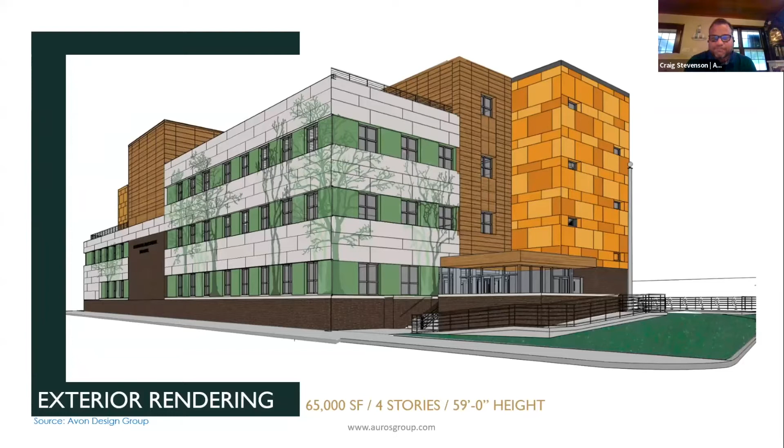Thanks, Craig. I get to sit back here for a second or 3 and admire this building. It's just lovely. So, this is my slide before the acronyms start and the engineers jump in. So why am I so proud of this building? Why, as an educator, this building, this school, it represents a couple of things, right? A set of commitments to the following things, really.

Certainly to our region and our city's journey to reduce the overall carbon footprint, and that's something to be super proud of. It certainly commits to the health of our students, our employees, and the community members that are going to use this public building going forward.

And as was mentioned earlier, we're a charter school, and charter schools have a distinct role in public education in the US, and that is to drive innovation in public education. And I see this building as an example of a next generation healthy and green school, all built within and on public school budgets and tax dollars. And so that is a terrific commitment and a terrific part of this journey.

Secondly, this building embodies the mission and values of our educational institution. It's a teaching tool that is dynamic and provides data every day that allows students to engage in and manipulate, and lots of evidence there. It allows our students to engage in air quality conversations and research around energy and storm water management, through that marriage of passive house and RESET Air.

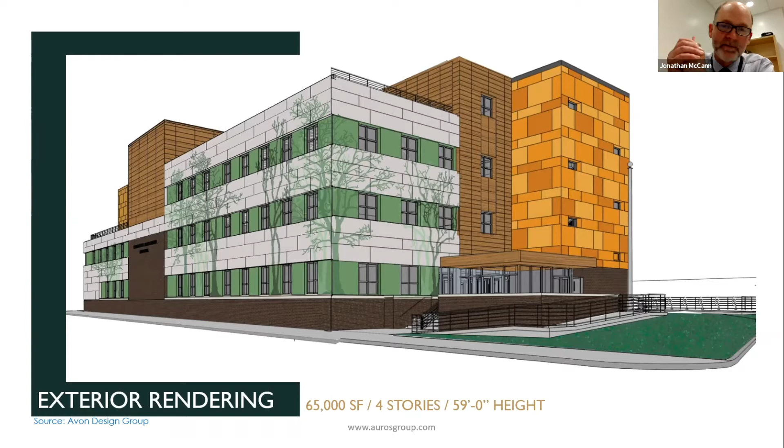And so that is what this building represents, all of that, and that continuum from kindergarten through 12th grade. So we're enormously proud of that work, and the fact that this is going to be a passive house and everything underneath that. So, Craig, you want to add to that? Nope, we're good to go, John. That was a great explanation. I'm just going to advance the slides here.

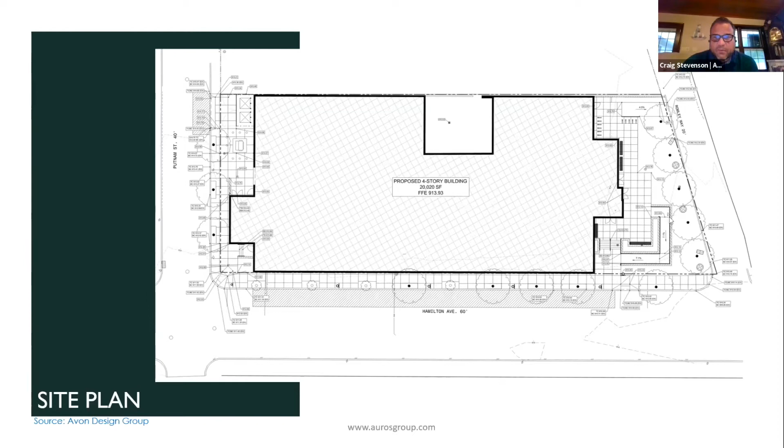So massing and orientation wasn't really an option. We had to really go after window to wall ratios and other criteria to try to help ourselves meet the envelope performance requirements of passive house. But this is exactly in line with the Environmental Charter School's mission for urban infill.

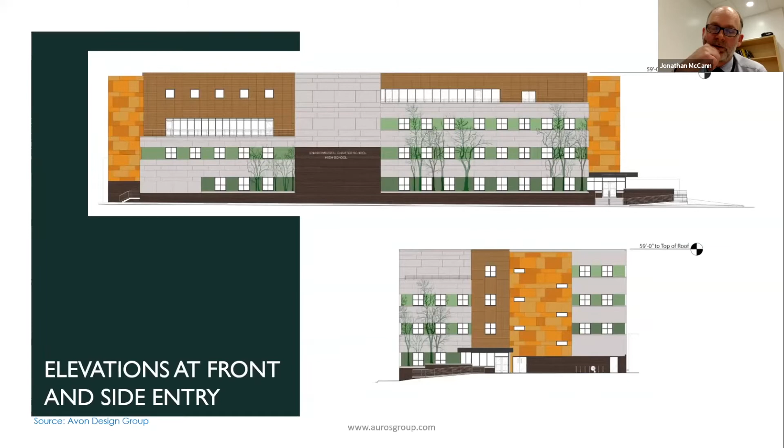And there's that elevation, and we begin to take a look at some of the features here. You'll see off to the left an outside classroom space. Outside space in a tight building like this is really golden. So we built in some outside space and terracing for outside classrooms and meeting space. And then up on the roof level, we have a number of outside spaces that are attached and flow out of various different classrooms and labs.

It provides a number of opportunities for some FF&E creations for students. These are adolescents. They don't like to be seen. They like to huddle. And that wide atrium provides that opportunity for us to design spaces for those folks to meet and for adults to meet, and faculty too.

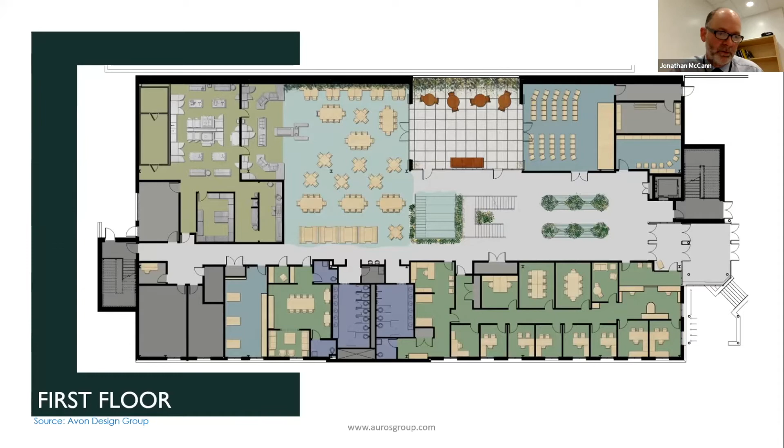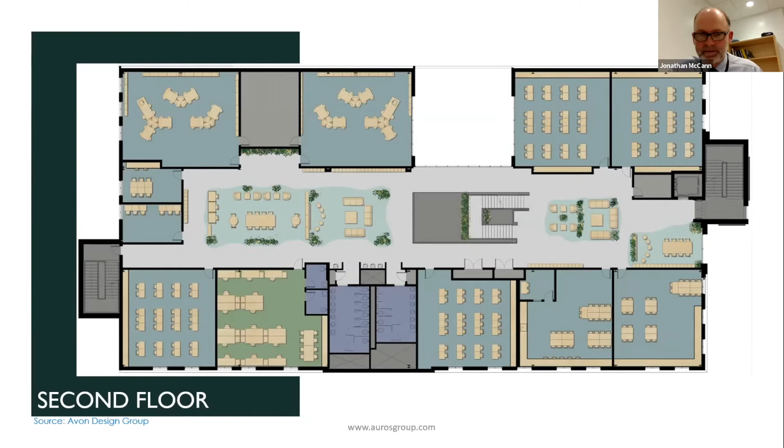You'll see some faculty co-working spaces in here as well that we've committed to, and then science labs along the back wall. And of course, with those science labs, one being a chemistry lab, we've had to work with the venting challenges there.

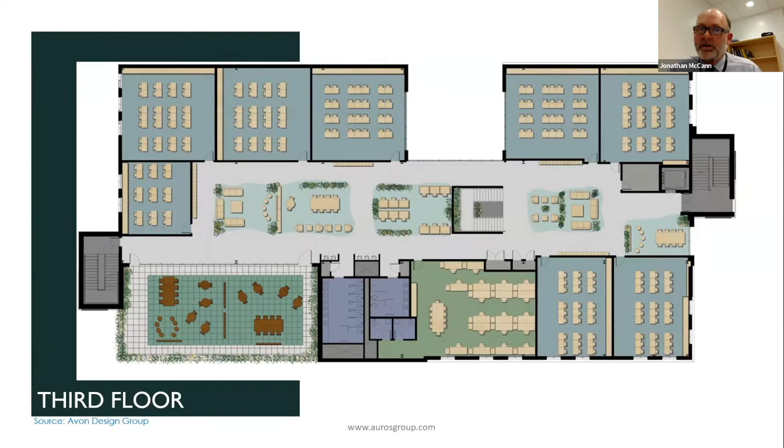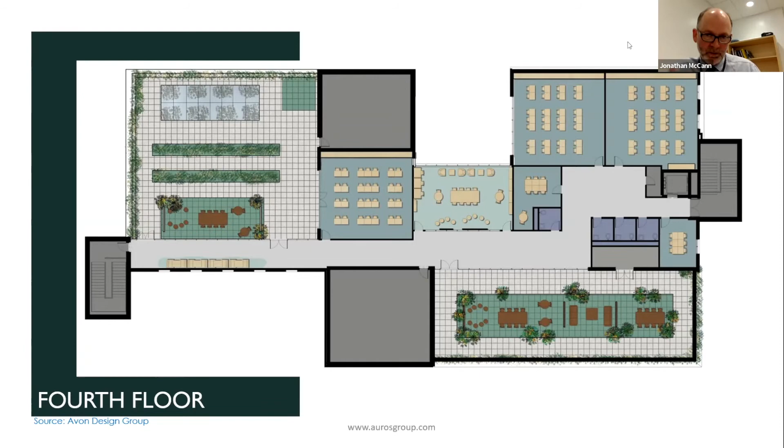All right, thanks, John. And as you can see, the goal for the charter school is to make sure that the students are able to get outside. John, what's the number? About 50% of the time students are spending outside at the environmental charter school? Indeed, yeah. So we used a lot of outdoor spaces in the building to help achieve that, but there's also parks and walks that are close and adjacent that we're also planning to incorporate into this design as well.

So the idea here and what we want to talk about is the approach we've taken towards the environmental charter school is to merge building science with data science. The building science side of this is passive house envelope first strategies, getting at the most efficient building we can build pre-renewables. The data science side of this is to set up the building with meters and sensors that can give us feedback loops to know whether or not John's getting what he paid for. That is how we get to zero energy and zero carbon and world-class indoor air quality over the life of the building.

This isn't a matter about designing a high-performance building. It's not a matter of constructing a high-performance building. It's a matter of operating a high-performance building for the life of this building for 75 years. That's why we're incorporating data science and building science together into this project. And we'll talk about that in a few minutes.

Yeah, Craig, anyone that knows anything about Pittsburgh, we don't live in the cleanest space. We have some serious air quality issues, and many days over the course of the year are coded in such a way that the students are encouraged to play inside. Building this building, of course, as I mentioned earlier, is a commitment to that.

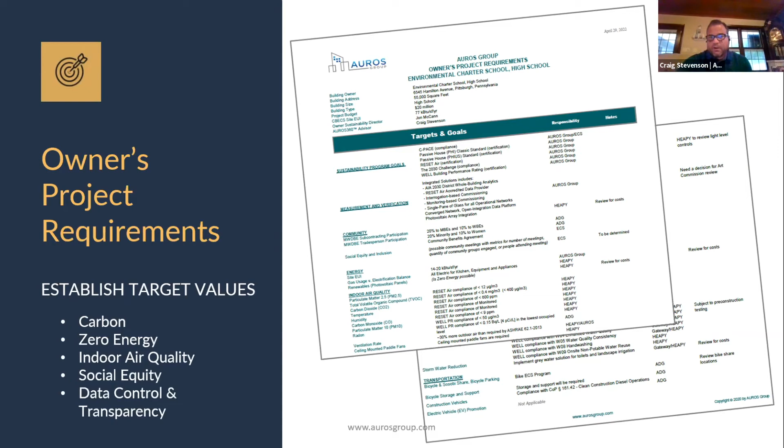And if we hit a budget issue or we hit a complexity, we use this OPR to basically go back and prioritize our goals. And this is how we make decisions. With a narrative, it's too hard to figure out what do I cut first, second, and third. With an OPR based on prioritizations and metrics, it makes it much, much easier for us.

So this is what Jon was talking about, right? And for this community, we don't spend a lot of time talking about passive house. This is more of a case study type presentation. But the idea here is we're using envelope first approaches to get at energy. When we do that, we solve other problems, right? We solve our air quality problems, as I just mentioned. We solve our sound mitigation problems because being in a passive house, it's extremely quiet.

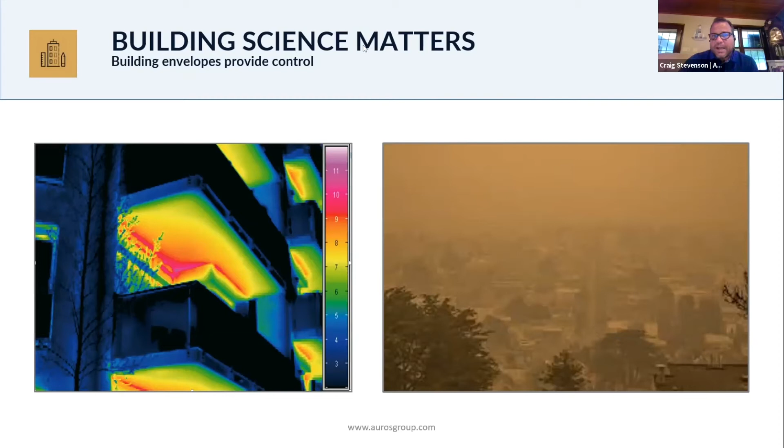And we solve light because we manage our window to wall ratio and the light availability that comes through those windows. So again, using an envelope first approach is the foundation. It's the infrastructure and how we pursue all of our project goals. It has to start with that. Otherwise, if we don't have the right envelope, we end up spending a premium to get at the rest of the goals. So this has been really the key and the secret to get at a whole building performance across all elements of performance.

So how do we do it? Again, we talk about this and we start early. Everybody in this community has talked about the value of integration and the value of early starting. And we wanted to reinforce that because it makes all the difference in the world. When we had set out to do the Environmental Charter School of Pittsburgh, we set our goals in before conceptual. We use those goals to write our RFPs and RFQs for our design team. They are coming in understanding exactly where we're going on this project.

Now, the OPR is a working document, so it's not cast in stone. It's not intended to be a fixed document. It evolves, just like a project schedule would evolve. So as we go through and we make decisions, we update our OPR. So when we send out our RFQ, we send it out with a baseline owner's project requirements report. And then as the team gets on board and we start getting into early design, we update that as we go forward.

And the idea here is we start very early, we model, and we then create a control estimate. And we're doing them simultaneously, continuously, and iteratively. So every time we do our massing and orientation, we check the model, we check the price. We do our envelope optimization, check the model, check the price. We do our system narrative, check the model, check the price. We're literally making all of our big decisions before we even get halfway through schematic design.

And for most architects that learn about passive house and try to start figuring this out, this is not normal for them, right? These guys are used to basically going all the way through schematic before they almost ever engage in MEP. And then the MEP comes in and they have a fixed envelope, fixed loads, and they go do their job. That doesn't work in a passive house project. You have to be collaborative and you have to be early to make this work.

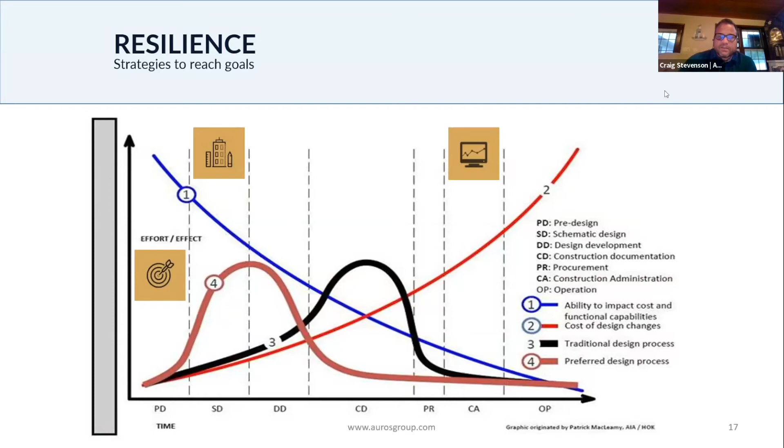So when we talk about smart building infrastructure, a lot of people think, okay, we're just buying a really sophisticated building automation system, or we're just buying a system in the building that might do something different for us. It's more than that. It's about getting at the data. The whole goal here is we want to get all the building performance data into one independent data layer. If we can do this right, we can set up our operational technologies to be open integrated, meaning non-proprietary, so that we can bid out our service agreements, because that was important to John. They don't want to become beholden to a vendor for 20 years. They want to be able to compete those in an open way.

We can then develop a converged network. A converged network combines the operational technologies, building automation, security systems, fire alarm, water meters, reset air sensors, into one network. Everything is an IP network. We use virtual LANs to segment that so that we can manage the data so it doesn't commingle. And then we save ourselves a lot of money in conduit and wiring, division 27, if you will, so that we don't have to run 25 networks in our building like we traditionally do. We're able to save a lot of money in conduit and wiring and convergence of these networks that we reinvest back into additional measurement verification systems.

And that's how we were able to get more value out of the processes because of what we save in converged networks. It's like in a passive house, taking our money that we save from MEP and putting it into our windows, for example, right? It's no different. We're taking money in a value prop and we're moving it into another area that we want.

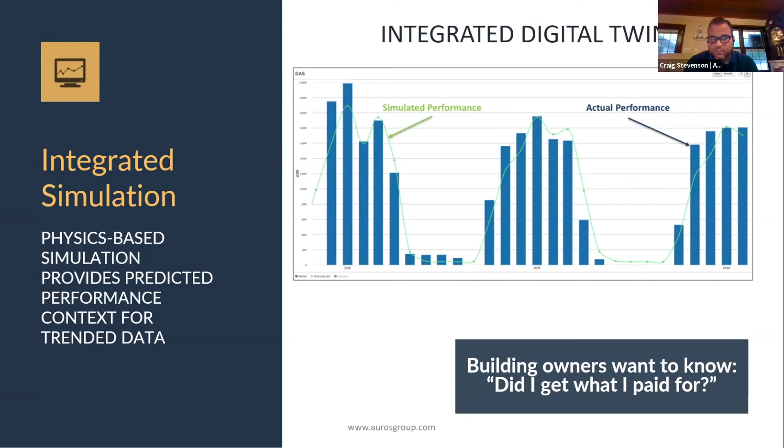What else can I do with that data? So if we're getting at dynamic simulated data, again, we talked about the value of using it for monitoring-based commissioning, but I can also use it for interrogation-based commissioning. And think about that. When we have a gap in performance, what do we do? We look to retro-commissioning. We bring boots on the ground into our buildings. And we spend hundreds of thousands of dollars to blindly try to find out what's going on. It's far cheaper and easier to use the technology we have in place to identify those gaps.

I can go into an IES-VE model and say, okay, maybe you changed the BAS system and it's no longer working 8 to 5, but it's working 24/7. We can set up the model, run a simulation, drop those targets back into our data layer, and we can see that instantly. We can run dozens of simulations very quickly and very easily to start to identify those performance gaps. And if you've ever heard of advanced analytic testing, fault detection and diagnostics and other testing like that, we can test those analytics in the virtual environment before we ever deploy them.

What's happening today is we're setting up, say, CO2 on demand. CO2 goes high, I want my fans to turn on. Well, when we set those up as analytics and put them into our buildings, if we don't test them, then we're using our clients as the guinea pigs to see if they work. And what we argue is, why do that at all? Why inconvenience our client? Why not test this in the virtual environment before we deploy it? That's what we do. We can also set this up for independent and proprietary data layers. Where this goes and what platform it's in, we're relatively agnostic to that.